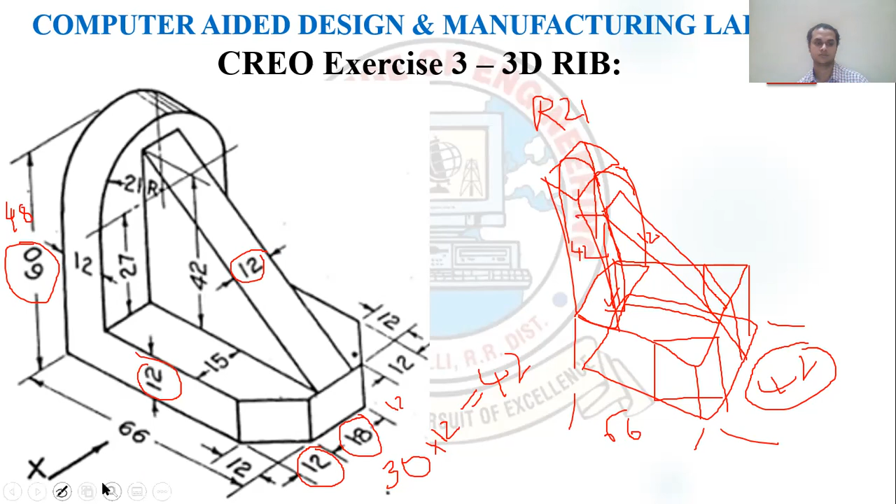It is a very small exercise, it takes very less time to complete it. So I'm erasing all things so that we can see.

So I'm sharing the PTC CREO Parametric 3.0 version.

So we are doing this after installing CREO software, click on Start, then All Programs, then click on PTC CREO folder. In that, select PTC CREO Parametric 3.0, so that is the version. Based on the version, the latest version is 6.2, so you can select those things.

Click on New, and it should be a part and solid, and directly give the name. The name here comes as RIB.

Remove use default template. The advantage of removing the default template is that default units are in inches, and if you remove it, then you can select your units as mm. So we will be removing use default template, and I'll click OK.

So I will be selecting mm as part solid and I'll be clicking OK. You can write your model name, who is modeling, and description of the component. You can give parameters here so that we can see the top view, front view and side view after clicking OK.

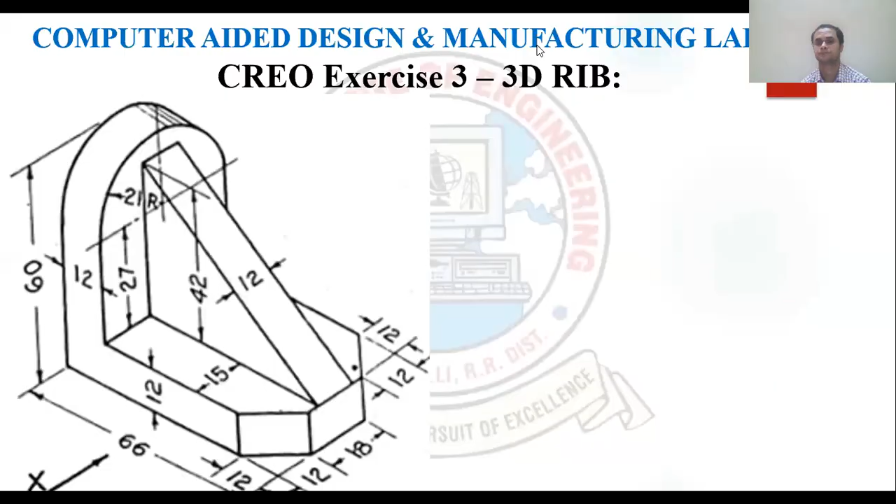It is still loading. So all three axes you can see, front view, top view also. I'll select the top view so that from the bottom I am generating. I click on extrude directly so that it is easy for me, and it will directly take you to the sketch.

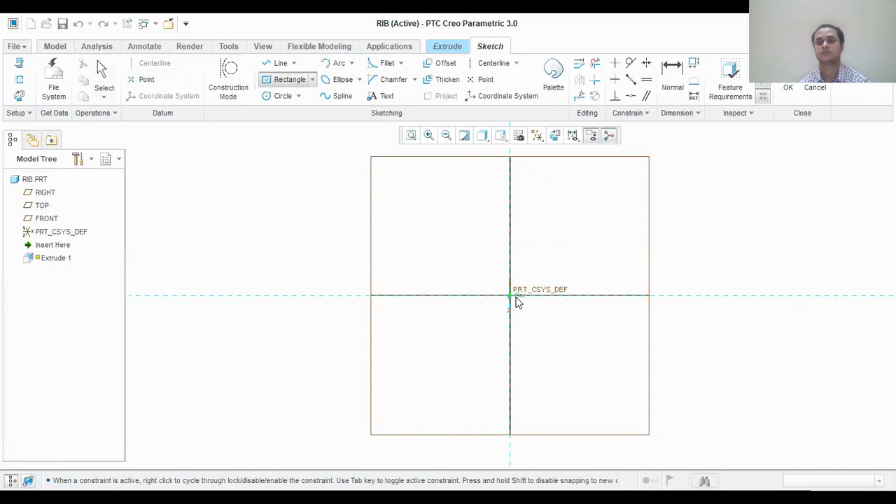Click on sketch view, and here I will be drawing a rectangle, center rectangle. I'll select this center rectangle and place this one, then click escape, escape two times, so that I can generate this one.

And this distance comes as 66, enter, and this distance comes as 60, enter. So one is 66, one is 60, click on OK.

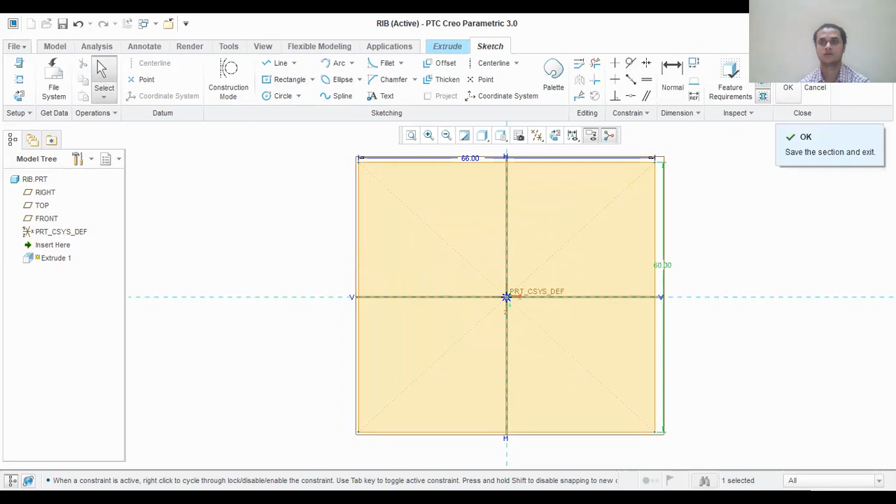So directly it will convert to extrude, and the height is 12. Directly give the height as 12, click OK, and click on the green tick so that it will be generated. You can see your object here.

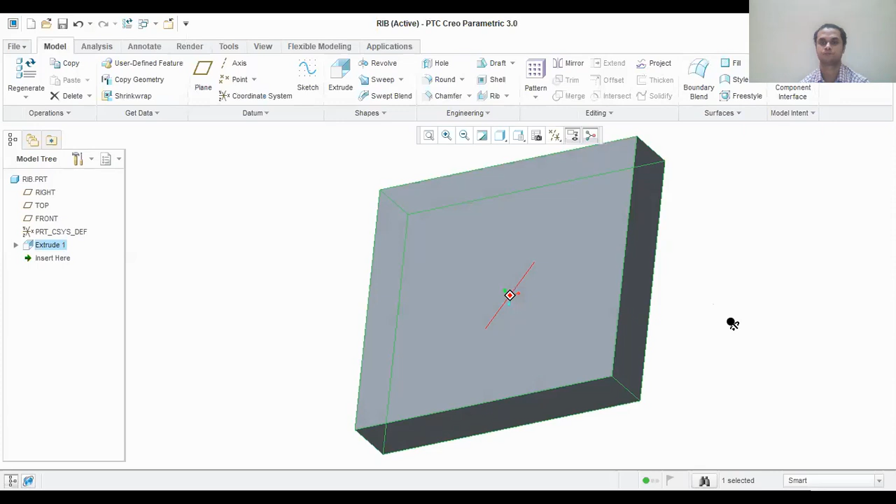You can see this object here, so this is 66... oh no. So I click on extrude section, right click and edit definition.

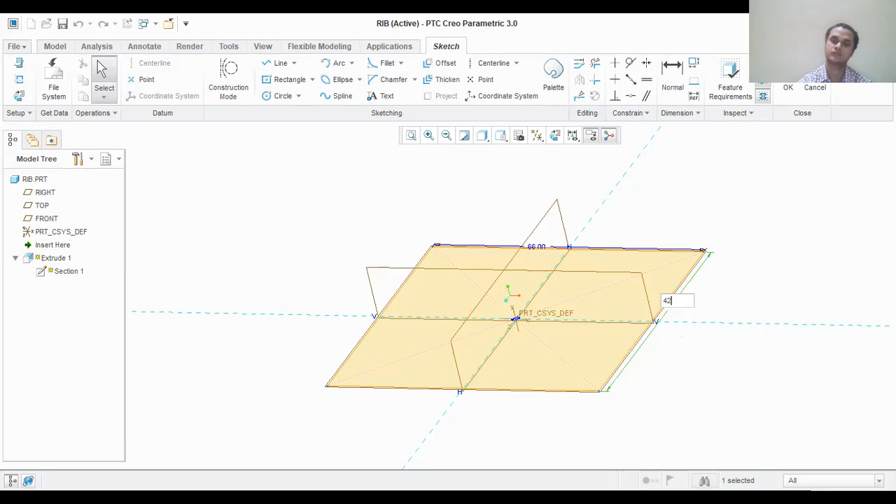So this distance is 42. I'll maintain it as 42, so that this is what I require. I click on OK so it regenerates. So this is the face what I require.

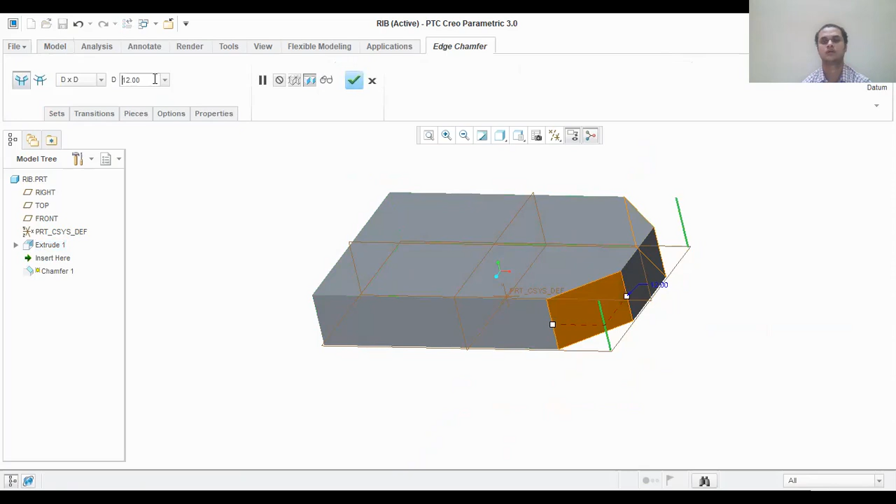I click on chamfer. I'll select the two edges. I'll click on the control button and select this edge and this edge. I'll select the value as 12 as per the figure, so I'll get the chamfer here. I click on OK, so the bottom face is complete.

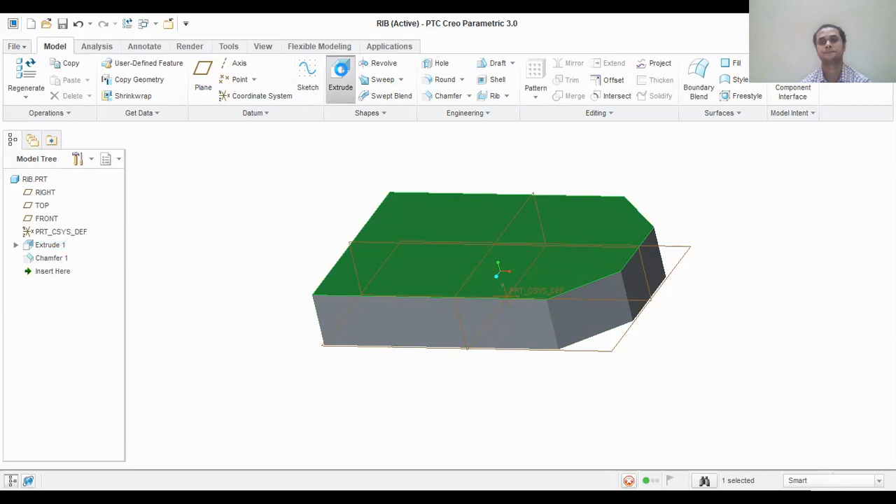Then I'll go for the top face. I'll select it, make sure that it should be in dark green color, and then click on extrude directly. You have to create a rectangle.

For this one I need references. I'll click on sketch view, then on this one I'll be clicking on references. So this is my reference, this is one more reference, and this is one more reference. I'll click on rectangle and corner rectangle, so from this corner you can generate a rectangle.

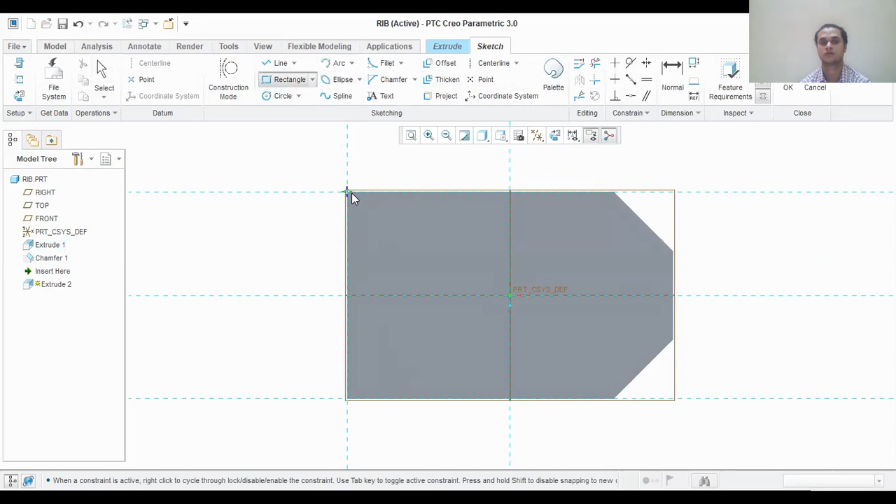So the width is same. I'll click on escape and escape. For this one, the width comes as 12. I'll click on OK so that I'll get the extrude. The height I calculated is totally 60.

From the bottom it is 60. 60 minus we are making it, so 60 minus 12 comes as 48. So we'll be making it as 48.

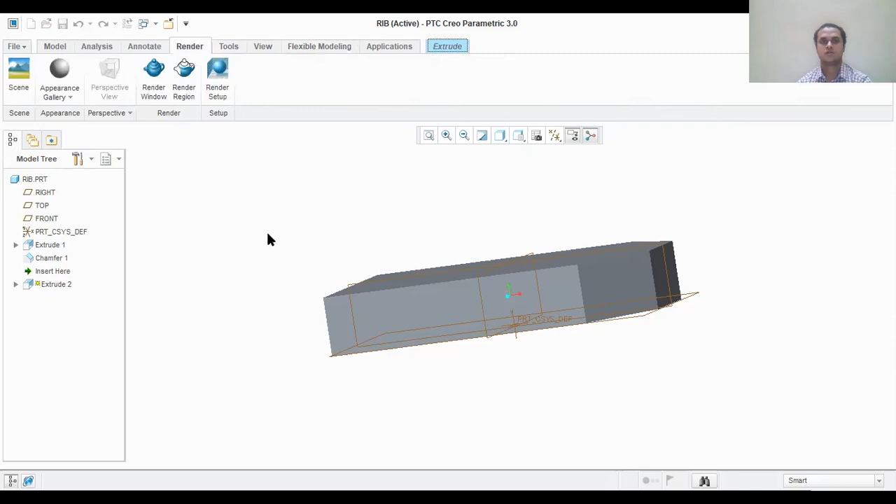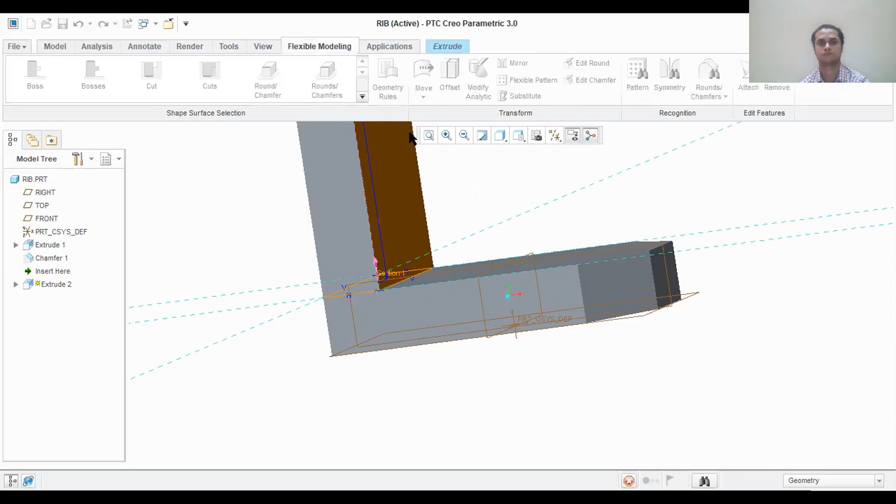So this is the height required. I'll make it as 48 and enter, so that this is the one I generate. I click on view so that I can see this one. So the height comes as 48 in this case. So this is the shape I required.

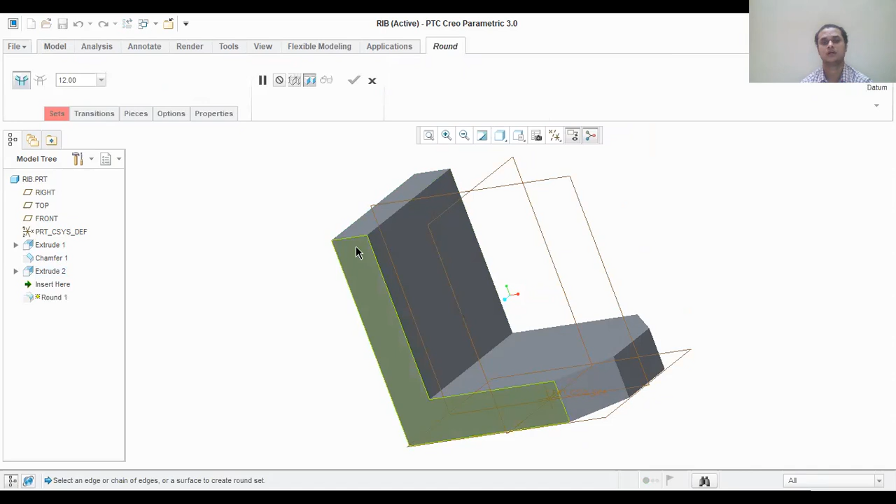So I use the round command. I select the round and select this edge, and again I'll click control and select this edge. Here I'll give the value: the width is 42, so the radius comes as 21. Radius 21 is already mentioned in the problem, so I click on OK, then I click on this face.

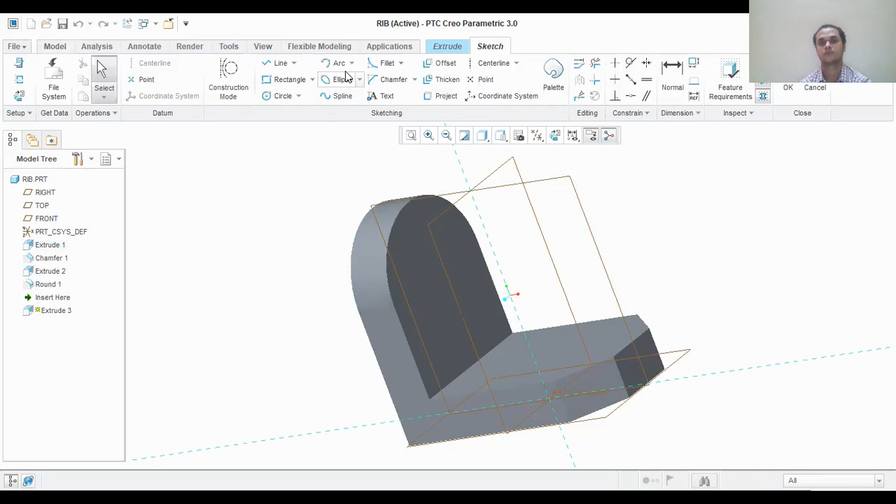Next I'll click on this, what is the plane. I'll select this plane, click on extrude, and click on sketch here. So this is what I'll be getting.

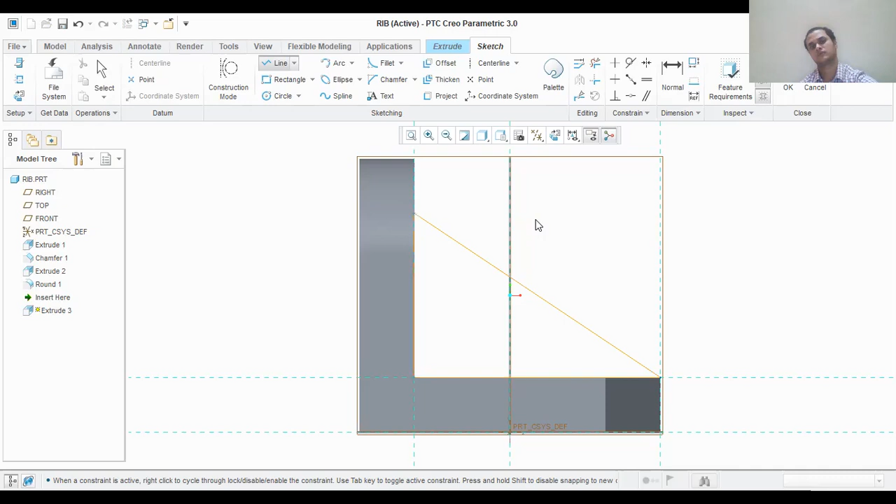Then click on references. I want a reference this side, a reference this side, and a reference this side. I'll click on close, then click on line chain. I'll select this point, this point, this point, and the joining point here. I click on escape and one more time escape, so two times I click on escape.

Here the height comes as 42, so I'll click enter, and click OK. Since it is already the extrude command, it will be coming here. So from this sketch, I'm cutting this side. If I flip, it is coming on the other side.

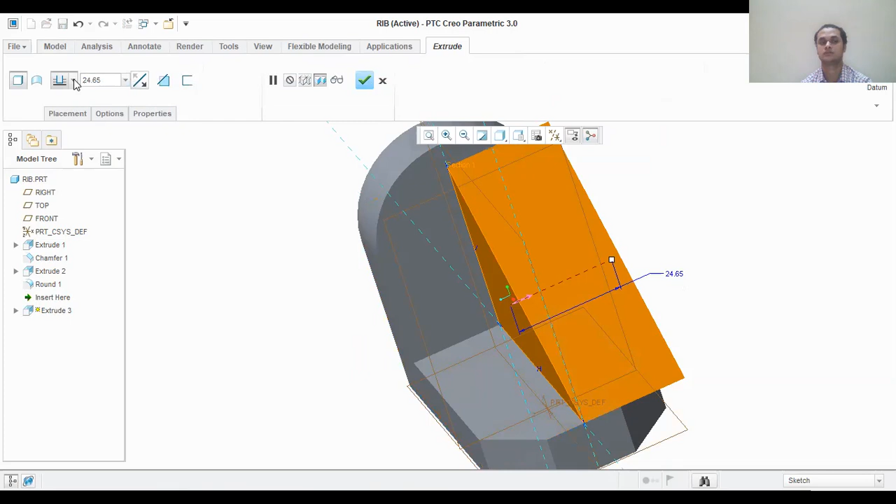If I want to have equal division, I'll click on this extrude and go on divide equally, so that it will divide equally. The value comes as 12, so I'll click on 12 and enter. This is the one I'm getting. I'll click on OK - this is what I need as extrude.

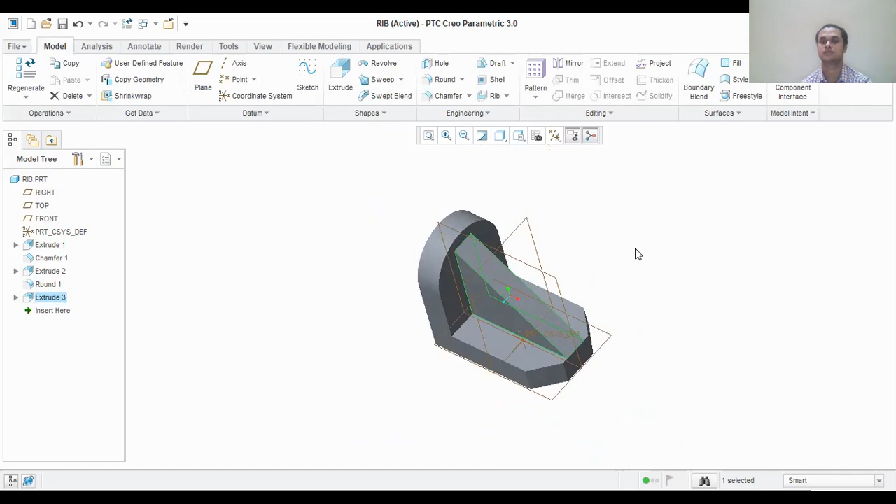Click on zoom out, make it as correct orientation - whatever they mentioned in the orientation, make the correct orientation and remove these planes. And I'll remove the CSYS. So this is what I require.

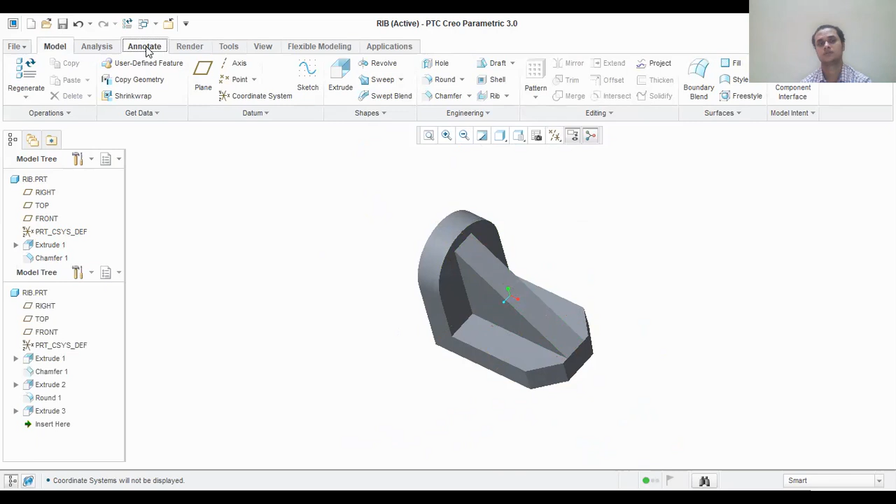They required 3D and I need to save it as annotation, so I'll click on annotations. I'll select the complete object. I'll click on control and select the other things whatever I require. So the complete object should have this green color line.

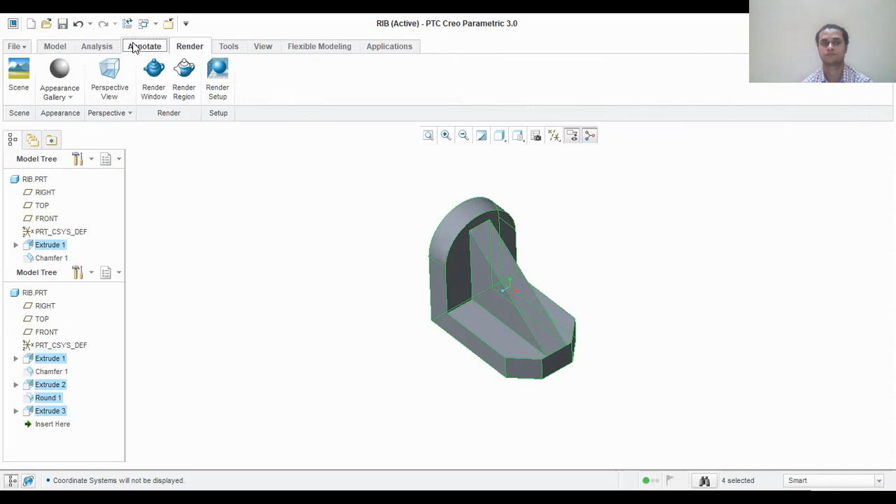Then I click on show annotations, so that all the annotations I can see in this case. So these are all the annotations. I'll select all and click OK so that I can drag it and place it in the center.

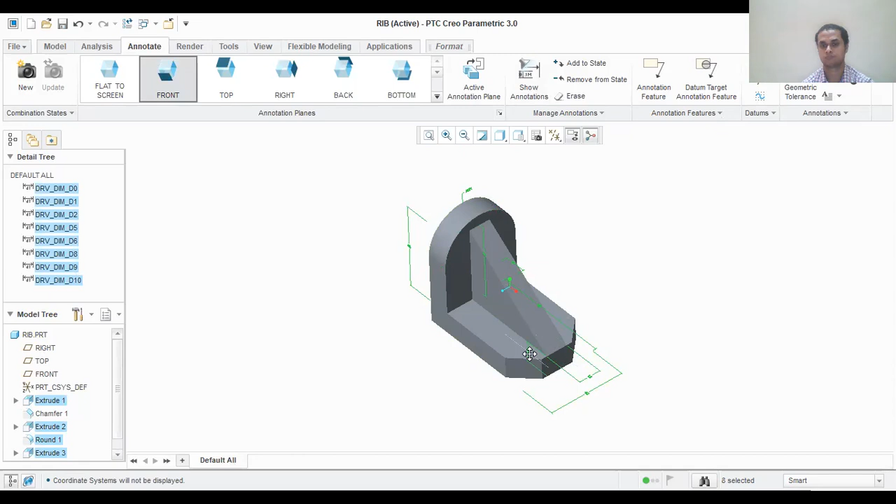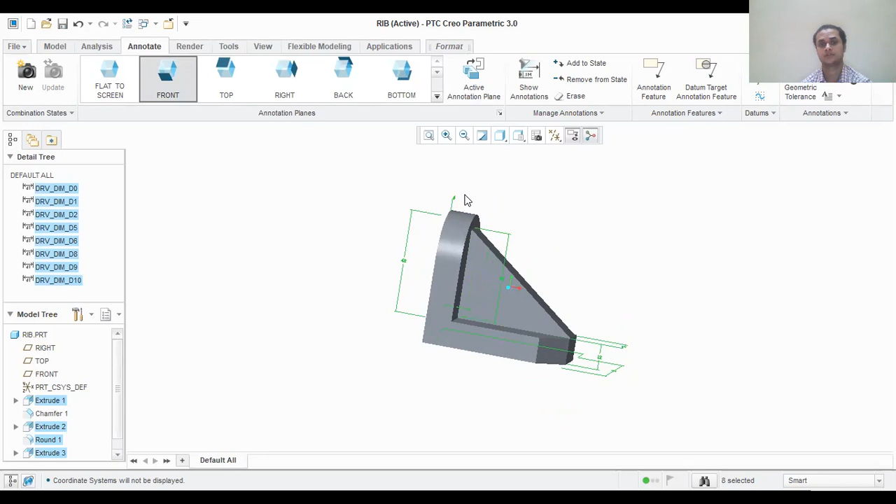So whatever the dimensions are there, you can drag it and place it in the center. Any other dimensions, this one, this dimension - this dimension is okay, not this dimension. So select this dimension, drag and paste. This is the radius dimension, so I can keep the radius.

So this is my orientation. Then I have to save it as PDF, so rather than that I click on File, Save As, Save a Copy. Here in the documents I will be saving it as RIB. The type will save it as .prt default file format, but I don't want default file format, so I'll click on PDF and select OK.

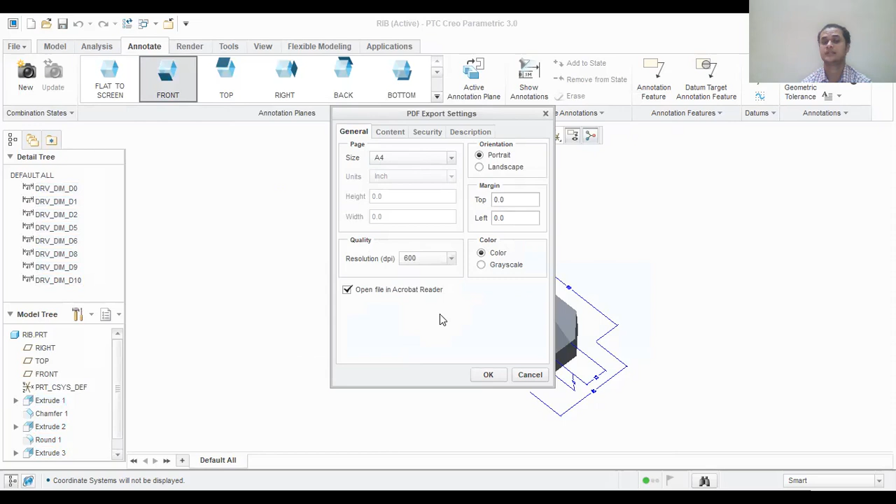So a PDF is generated, it will ask the A4 size, portrait, and this thing. Resolution is asked, so if you want more quality, click on resolution and change to 600 dpi and click OK. After saving the file, it will open in the PDF viewer - most people will use Adobe Reader, so it will open in Adobe Reader.

So that completion. Then the PDF viewer will open and it will be saved in this file format. I hope you all have understood.